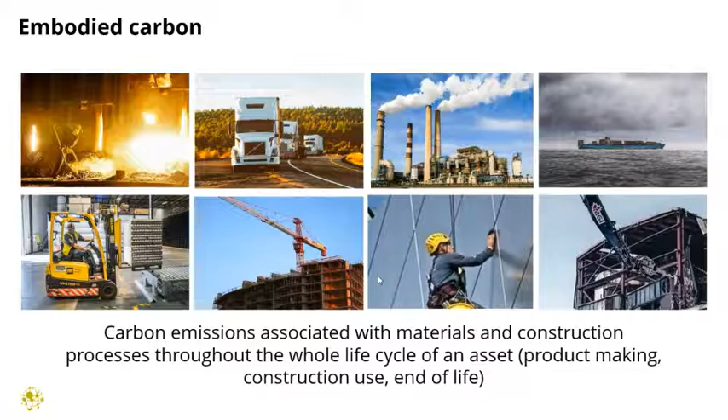First and foremost, embodied carbon. When we say embodied carbon, these are the carbon emissions associated with the materials and the construction processes throughout the whole life cycle of an asset. So this could be a building asset, or as we're talking about today, it would be the product itself, the MEP equipment.

So when you do an embodied carbon assessment, you can assess this through a life cycle assessment, which quantifies the environmental impacts. In this case, we're talking about the global warming potential. The different stages of the life cycle are defined by the EN standard into different stages and submodules, typically A, B, C, and D. So to summarize, if you were going to carry out an embodied carbon assessment, you would add the carbon emissions of the A stages you see on screen, the B stages excluding operational, which is B6 and B7, and the C stages as well, which is end of life.

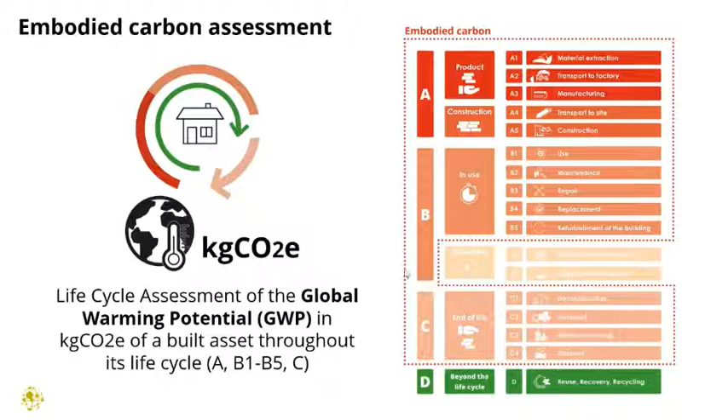This would form what is called whole life carbon of a building if you were to add the embodied carbon and the operational carbon together. We've become really familiar with operational carbon as an industry, but embodied carbon is that gap that's really being pushed for, even more so in MEP, as this is something that's not accounted for as often.

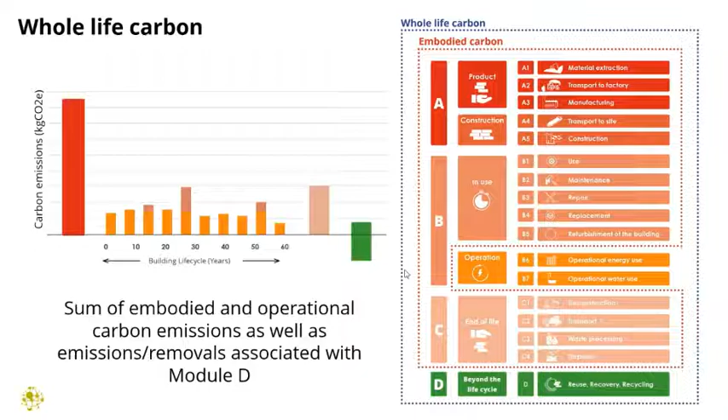Embodied carbon specifically is becoming more relevant. As I mentioned, operational carbon has been a focus - the grid is decarbonizing, we're installing more efficient MEP equipment. So as we see the pie chart of embodied versus operational carbon in more recent buildings and new builds, we see that the embodied carbon is really taking over this overall percentage, largely due to the operational really being a focus. So we need to bring the embodied carbon up to that same level.

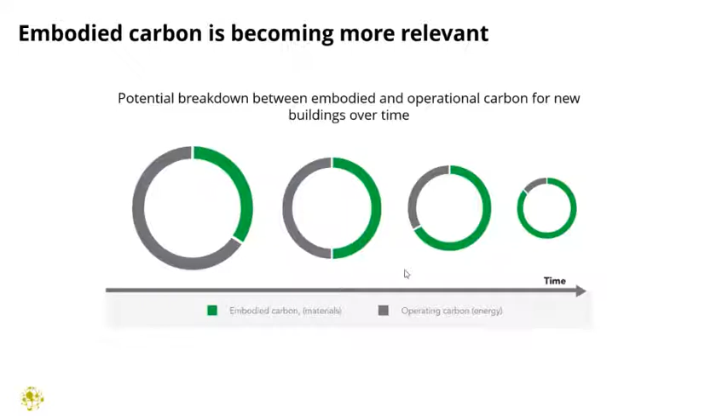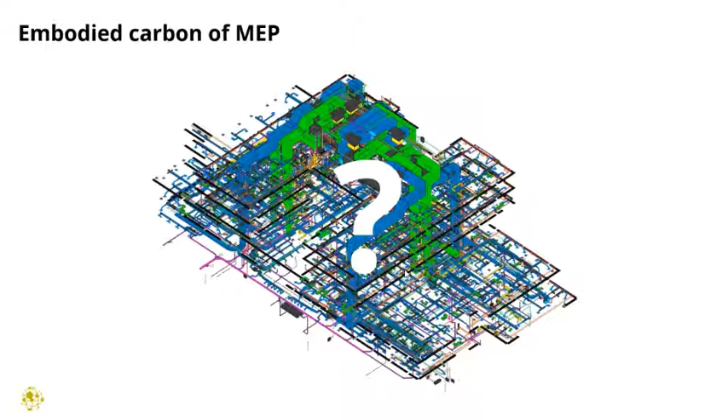And why MEP specifically? There's lots of conversations happening around the embodied carbon of structure and facades. You can find EPDs of different architectural elements, windows, just kind of the skin of the building, but not so much about MEP. It's really an area which lacks data sources, so that's why it kind of gets pushed to the bottom. But if you really think about it, it's something that can be really high in the overall embodied carbon impact of a building.

So if we want to think of the quantities, MEP is something that's quite hard to grasp because usually it's hidden - in risers and ceiling voids and so on. But if we really try and grasp what the overall quantity is, a study from the Carbon Leadership Forum estimates that for a commercial building, it can be between 15 to 25 kilograms CO2 per meter squared. So if you think about this for a 2,000 meter squared building, you could have about 25 tons of MEP equipment. And to visualize it further, that would be kind of equivalent to a humpback whale, which is massive.

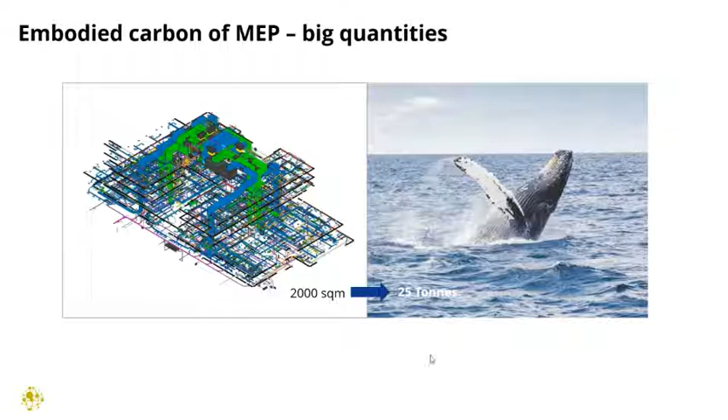The embodied carbon of MEP - another reason why it's really important is that it's usually made of very high impact materials. Steel is something we see used really often in a lot of MEP equipment for things like ductwork, casing, piping and pumps. Cast iron we also see a lot, used in component housing of equipment. Aluminium in electric motors and heat exchangers, and as we know, aluminium generally has a high embodied carbon impact. We see copper being used. LED lights have rare earth elements which also have a high embodied carbon impact. So that's why it's something really important to consider.

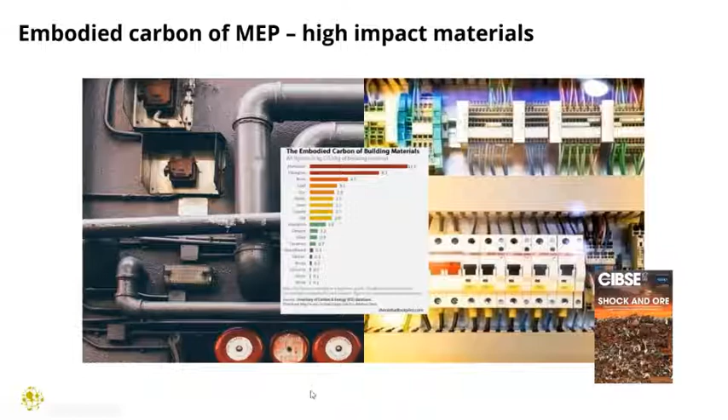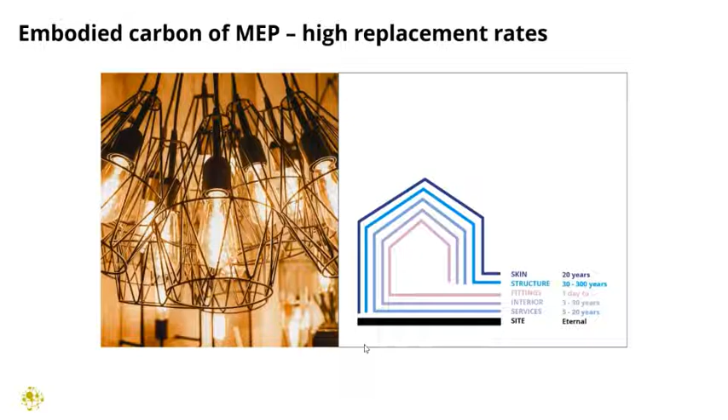The other thing to keep in mind is MEP generally has quite a high replacement rate. So if we think of the building life cycle being over 30, 60 years, generally the structure would not need to be replaced. The skin as well, unless it's a surface that wears very easily, it's likely that wouldn't need a full replacement. But MEP is something you can see typically being replaced every 10 to 15 years, just due to it being the end of life of the product.

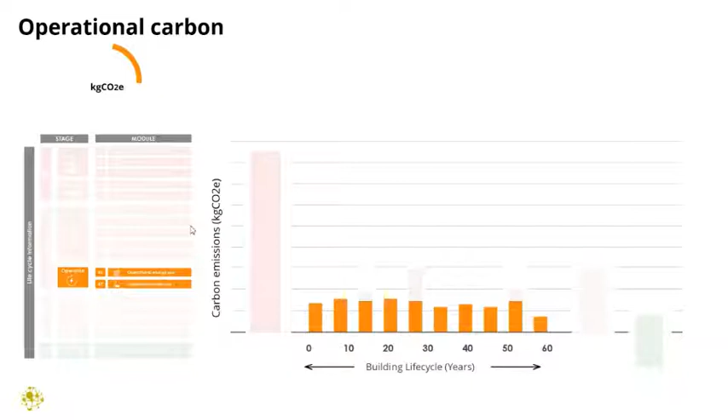This graph is just showing across the building life cycle - operational is something we see throughout the building's life cycle. Embodied carbon kind of fills in that gap. We have the really high upfront embodied carbon once we construct the building, we have the consistent repair and replacement impacts throughout the life cycle, and this is where MEP becomes really important. And then, of course, the end of life impacts as well. So this is just feeding into the bigger picture.

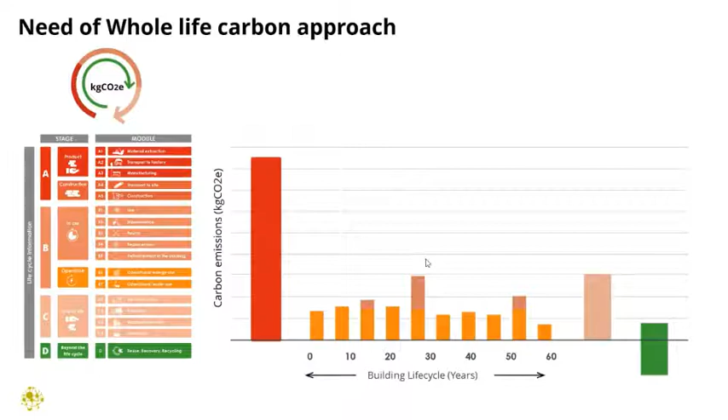Now I'm going to go through embodied carbon reduction in MEP design, and these are very basic, high-level things that you can look at, especially during early stages in the design process.

Firstly, less is more. This is self-explanatory - if there's less MEP, there's going to be less embodied carbon impact, but it really makes sense when you look at designing a building. That includes a fabric-first approach, implementing more passive design measures, which technically designs out the MEP because it reduces the overall weight of MEP needed as you rely on more passive measures rather than mechanical ones. And when you do specify MEP, which is inevitable, look at the products you're specifying - specify equipment with lower weight, that's just something to look out for.

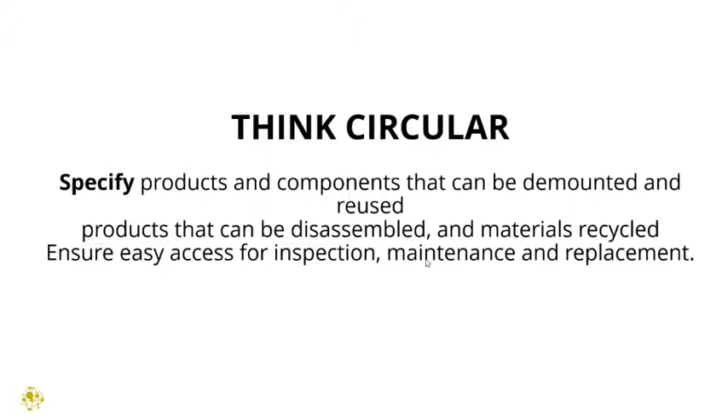The second thing is thinking circularly. So specify products that can be demounted and reused as well. Think about how they're assembled - are they using dry fixtures, like bolts, rather than adhesives? That allows them to be disassembled at end of life. Also work with architects to consider how the MEP has been designed for inspection, maintenance, and replacement. You don't want to be tearing out elements of the architecture to reach your MEP - so just early stage design coordination.

Thirdly is to mitigate and reduce refrigerant leakage. A lot of the MEP products we specify for cooling use high-impact refrigerants. So be conscious of what refrigerant is used in your product - first, ensure it has low leakage rates, and ensure the refrigerant is 100% recovered. For anyone interested in this topic, we've recently produced a refrigerant leakage best practice guide, which looks into more detail on how to mitigate refrigerant leakage, just because it's such a big impact.

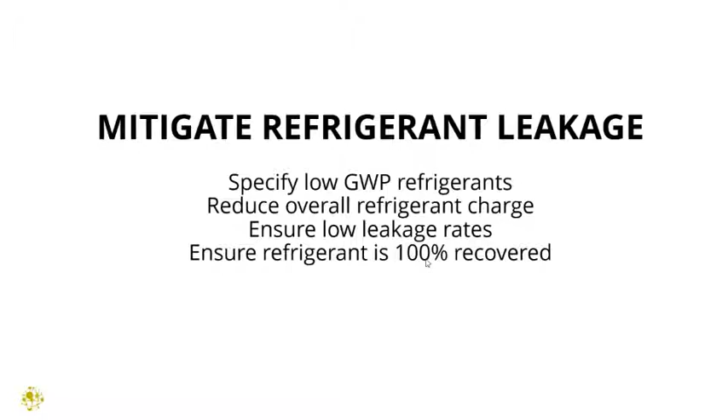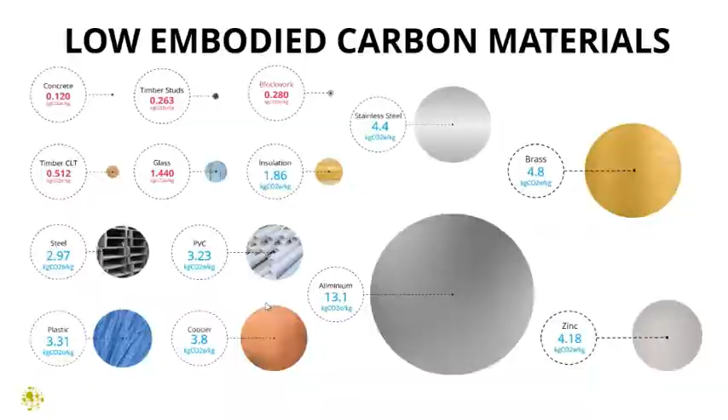For your own reference, hopefully everyone's downloaded the TM65 from the CIBSE website, but if not, you can always access it from the link on the website. We've included a few slides with flag placeholders, so if you're interested in reading a bit more, you can go to those pages.

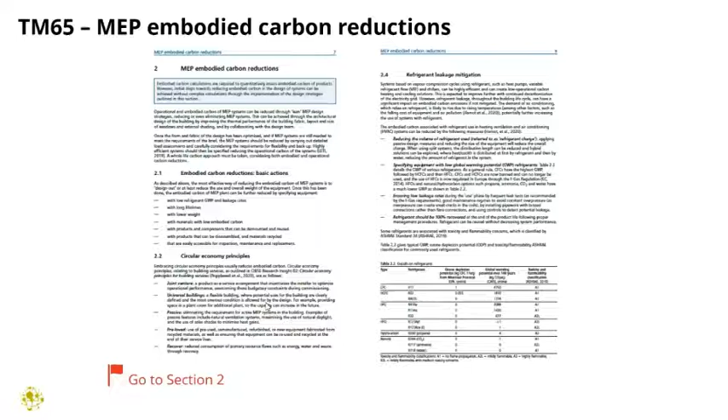So I'm going to pass along to Leo now, who's going to talk about EPDs and then take us through the TM65 methodology.

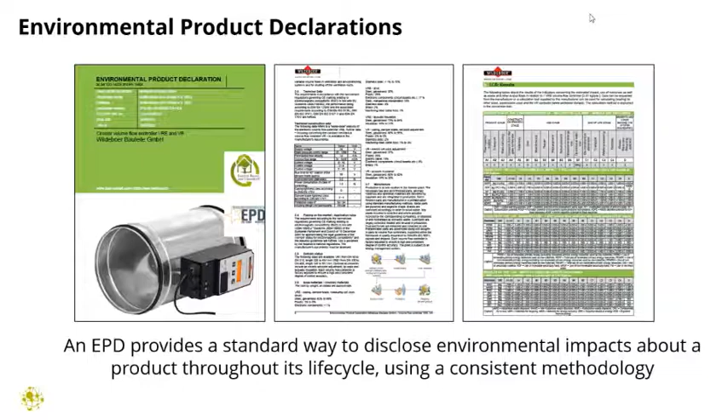Great, thanks a lot, Yara. So we're going to kick it off with EPDs, which stands for Environmental Product Declaration - a good source of information to understand whether or not the product we're assessing is actually low in carbon or not. What is an EPD? It's a standard way to disclose information, and the impacts about the product are disclosed throughout its life cycle, using a consistent methodology compliant with EN 15804 in Europe, which is the standard defining exactly how to structure an EPD.

Where do we find EPDs? The best source of information is usually the manufacturer itself, or we can have a look at some databases like IBU in Germany, or INIES in France, or EcoPassport in Europe. Eco Platform is another good source of information.

The issue with EPDs is that it's quite hard to make a comparison between two of them. The important thing to consider is, as they say, apples with apples and oranges with oranges. Whilst EPDs are regulated by the EN standard, even within the same product type and category, we find discrepancies relating to different understanding or different revisions of what's called a PCR - product category rules - which guides you through the process of developing an EPD. Hence the need for consistency, hence it's quite hard to compare these two.

This is where the CIBSE TM65 methodology comes in - we're exactly trying to bring that into the conversation. There is a knowledge gap, and that knowledge gap is exactly what we're trying to fill in MEP.

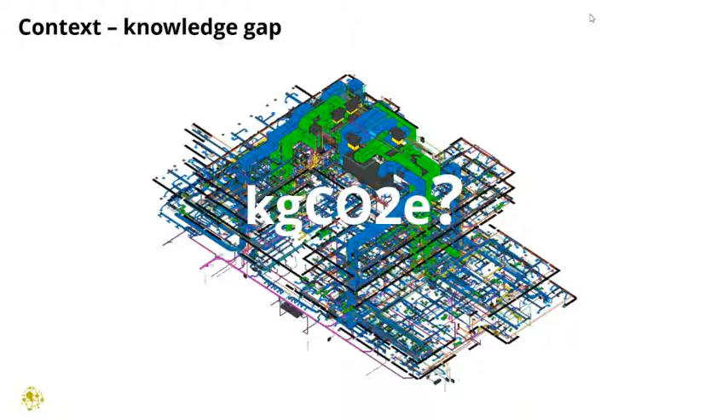It's quite hard to find EPDs related to MEP systems, and even if there are any, there is the additional hurdle of: can we compare this? Is it actually developed in the same way? Therefore, unfortunately, there is lack of information. Usually it's quite hard to find, but even if you find information, there might be lack of certainty when it comes to comparing things.

So the CIBSE TM65 aim and scope is really on embodied carbon at product level of MEP, and it was to create a methodology which is consistent to assess embodied carbon values when no EPDs are available. The goal is to create data and make research studies possible, and to make that comparison possible. The hope is that TM65 will also help building services engineers and industry to improve their knowledge of embodied carbon in building services, and then to make better decisions when developing a whole life cycle assessment and when thinking about different options for their buildings.

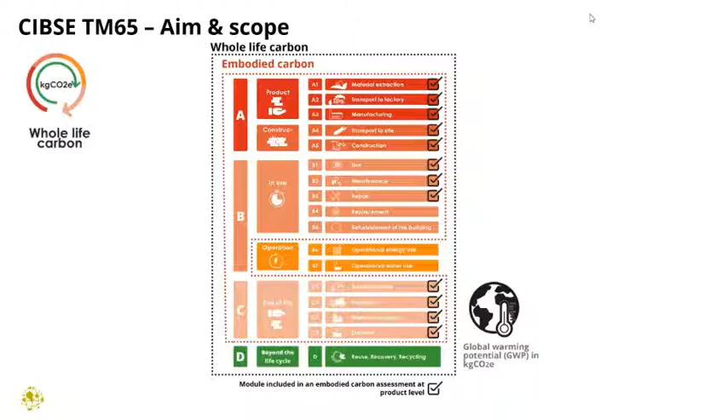This is by no means a final process, but is working towards getting that consistency while EPDs are being developed.

So how did we develop the process? What are the steps? We have three main steps. First, a data collection phase where product information is gathered from the manufacturer using a manufacturer form, which is an Excel file. Then we move on to the calculation stage, where there are two calculation methods depending on the level of information provided by the manufacturer. We have a section A filled in which allows us to do a basic calculation, or a section A plus B filled in which allows us to carry out mid-level calculations.

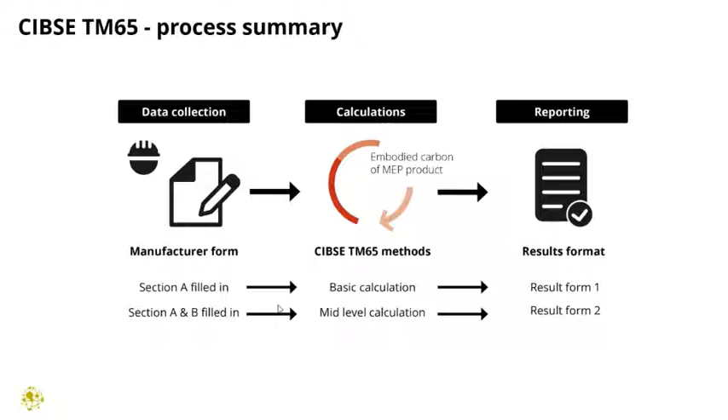The difference in terms of data, if we move to the next slide, we can see that both of them are much easier than an EPD. Basic being really quite approachable by even small to medium-sized manufacturers. Manufacturer involvement is quite low for the basic, so we don't really need to know that much from the manufacturer, and we can actually get in touch with a few. Mid-level calculation is a bit more, but what we can see is that in an EPD, both the manufacturer involvement and how detailed the results are is much greater.

The limitation here is that the ease of execution of an EPD is not really there, and the information that we need from the manufacturer is a lot. And this is, as we mentioned many times, where the TM65 fills the gap.

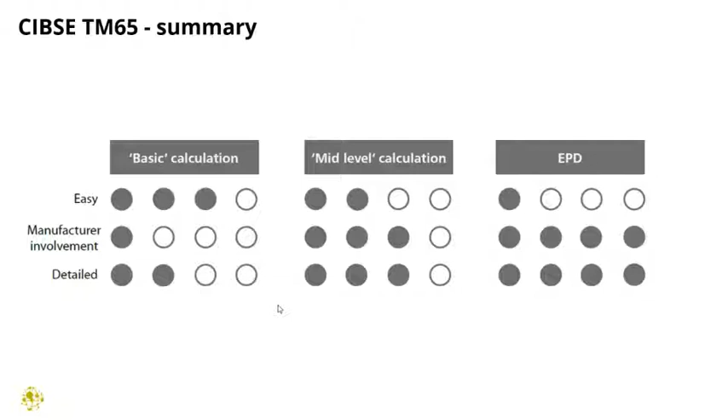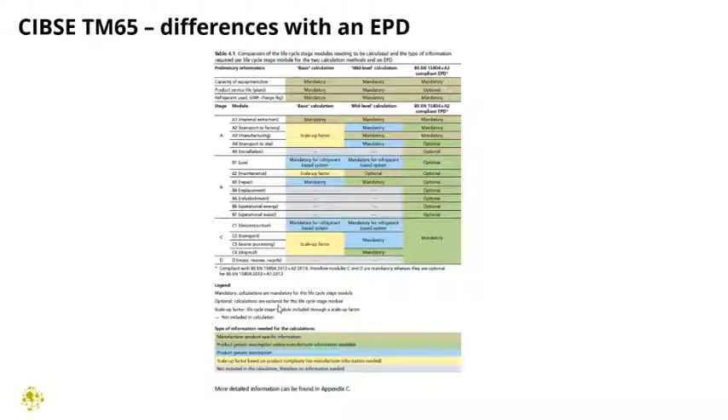So there is a section in the TM65 about the difference between an EPD and a TM65. It's color coded, so you know exactly what the assumptions are and at which life cycle stages - A, B, and C: up front, in use, and end of life. They're all detailed in there. As you can see, it's all greened out for an EPD, whilst other gaps are filled with assumptions in this methodology. You can find this at page 13 and Appendix C of the TM65 methodology.

The process, basically, we want to make clear that asking for an EPD should be the first step, so always go for that one. Always mention that it's worth investing the time if they're thinking about developing an EPD. If not available, mention also that this is a conservative type of assessment, and therefore we are pushing further for the development of an EPD if the resources are there.

The second thing is to ask the manufacturer to complete the form. There's two different types: part A only, or part A plus part B. And the last step is sending the information to CIBSE, which is really key - that's what we use to create the template, and it might take some time. But the useful thing about this is that we get the information from the manufacturer, we can get back to them and bring some value to them, but also we can create a benchmark for the product and build a database.

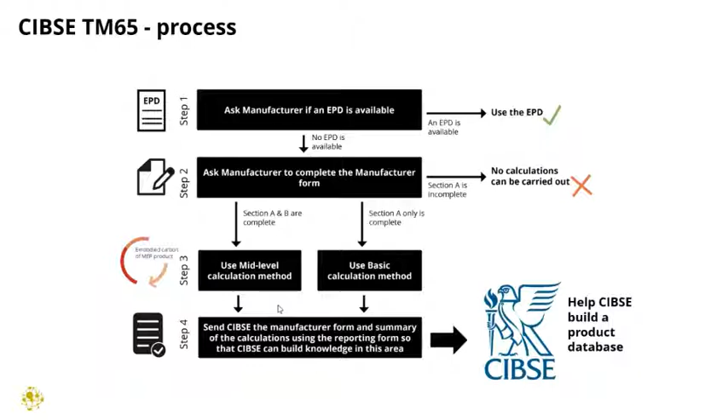So if there are no EPDs for the MEP equipment that you're considering, you need to collect data from the manufacturer. The manufacturer form is structured in three sections.

Section A, which is the basic, will need the manufacturer to fill out the material composition breakdown, which is actually the most important part. Then there's section B with supplementary information on energy consumption. And if the manufacturer is able to provide this info, there's also additional information that we, and CIBSE, will happily take on board, which has nothing to do with the calculations itself, but is about improving the next iteration of the process.

Before we move on, in section A we need at least 95% of the material composition breakdown. We assume that if we get at least 95%, the remaining 5% will actually be steel. If we don't have this basic information, unfortunately the calculation is not possible. So there's a really big focus on this aspect.

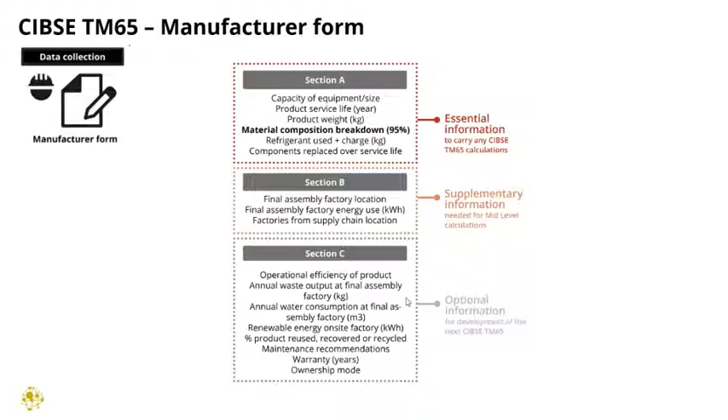Then you calculate the emission linked with the repair, meaning the components that are replaced throughout the life of the product. Usually, if not given by the manufacturer, it's about 10% of the overall initial impacts. Then you use the scale-up factors, which change depending on the product complexity, and finally we multiply by a buffer factor, as we want to make this basic calculation conservative. Finally, if applicable for the product, you can add your refrigerant leakage impact, which happens during the equipment use and decommissioning. So these are the 4 different steps.

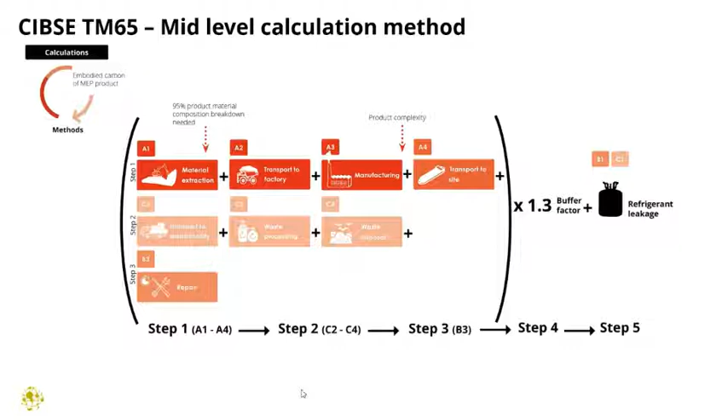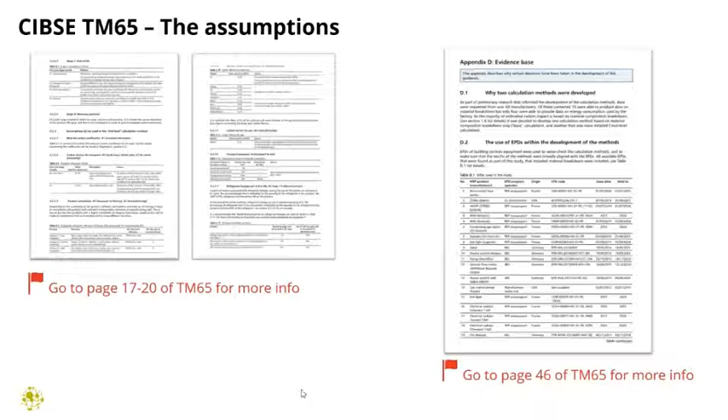Now, in the next slide, we can also show you what the different assumptions are. As we said, they are location specific for the UK, so you need to be mindful of that if used elsewhere, but basically you can find them on page 17 to 20 of the TM65, or also page 46 of the TM65, again, for additional info.

For reporting results, you can clearly outline your inputs and outputs. That's quite important—transparency is always quite critical when reporting for embodied carbon calculations. We encourage people to be consistent and to make it easier to analyze data, again in case we need to go back, check the assumptions, and then use this information to further improve the methodology in later stages.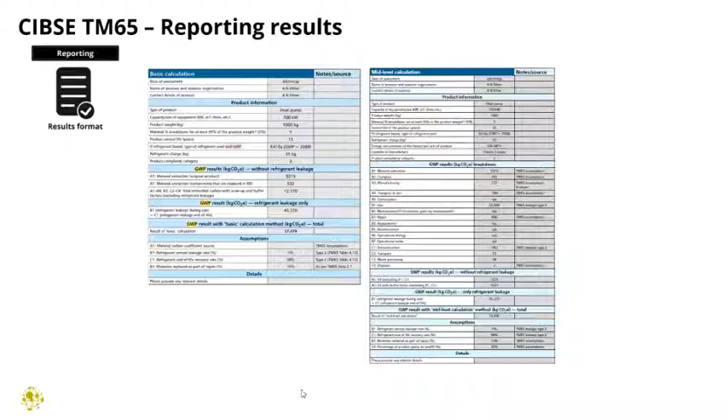The next slide actually shows the different impact between using a basic calculation and a mid-level calculation. What we can see here is the basic calculation is quite simple in the sense that we don't have that much granularity or transparency on what's going on behind the curtains in terms of the manufacturing side of things.

What we wanted to represent here and pinpoint exactly is the material extraction and material composition, which you can see highlighted in blue. B3 repair is allocated as a percentage if not provided by the manufacturer. The rest is a scale-up factor plus buffer factor, which even compared to a mid-level calculation, which is still conservative compared to an EPD, is higher. So yet again, another incentive to provide more rather than less.

Even just from the list of different LC modules assessed here, you can see we have much more granularity of what goes on behind the curtains.

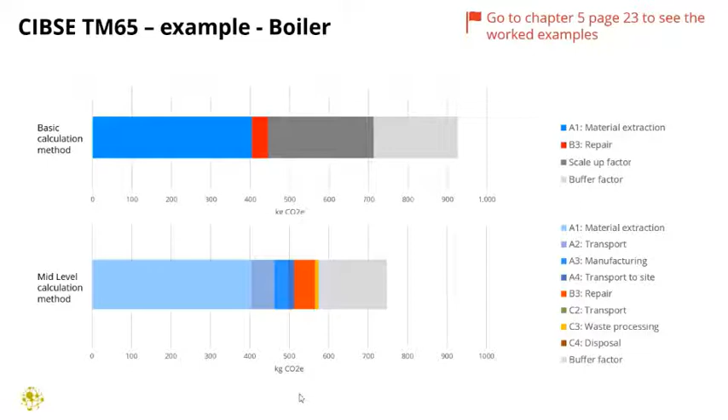One way I like to describe it to the manufacturer is: yes, you can give us only the basic information, but if you want specific information on your manufacturing line and your production energies, whether or not you're being more sustainable, using less energy, we need that information. Otherwise, we have no visibility and we can't represent that properly in our final results for TM65.

Moving on, you can see here the appendix, which is taken from the TM65 — we also used it in the previous slides. I highly recommend going into the appendix and checking it out, so you can see bit by bit what each individual scope and each LC module we calculate represents, how we do it, and get an understanding of where we fill those gaps with assumptions. Taking an inside look and understanding the methodology yourself is always advisable.

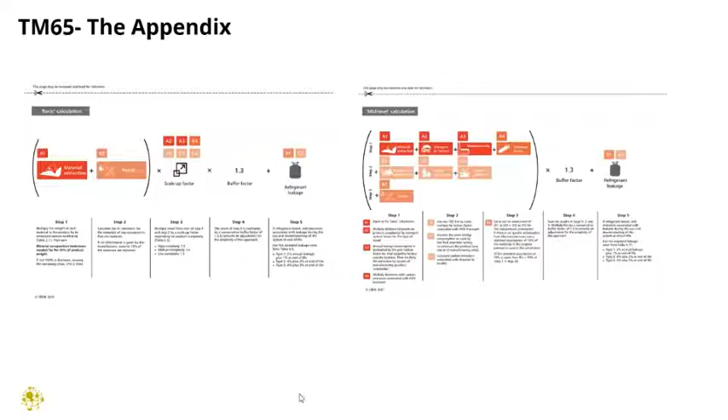Thank you, Leo. I'm going to jump back on to take us through a CIBSE TM65 worked example. The purpose is to highlight some tips and things to look out for when doing this, and to show you that it's something you can actually produce quite quickly. So although it seems complicated at first glance, it could be simpler than you initially thought. We're going to look at a heat pump, for example.

This is information that you would get from a manufacturer. Say you've sent them the manufacturer form and asked for section A. They've specified it's a heat pump, we have its weight, its capacity, and they've given us a material breakdown, and so on. So the first thing to ask is: is this all the information that we need?

The first thing to spot is that if we compare, they had only given up to 95%. So that's your first flag — as Leo mentioned earlier, it needs to be a minimum of 95% in order to carry out the calculation.

The next thing is, because it's a heat pump, there's refrigerant associated with it. So it's always important to know the type of refrigerant used, so we can calculate the global warming potential impact of that refrigerant across the life cycle of the product.

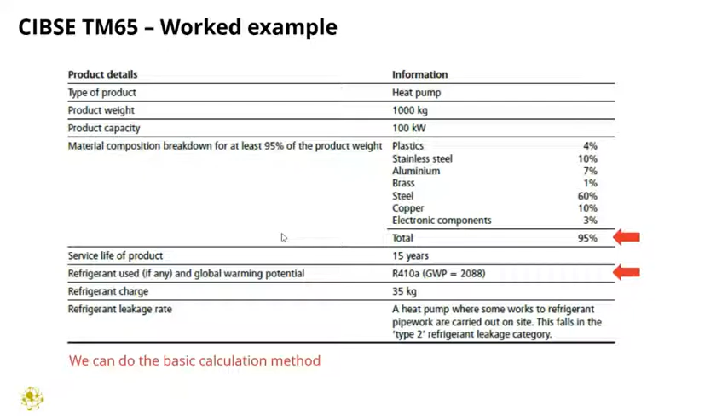Now that we have all of that information, we can go ahead and apply it to the basic calculation method.

The first thing is step 1, where we look at all of the materials they've given us and multiply the proportion of that material by the embodied carbon coefficient. Here we looked at steel, aluminium, plastic, stainless steel, copper, electronic components, and brass — those are all the ones in the initial manufacturer form.

The thing not to forget is that in order to get it up to 100%, you always need to account for that remaining 5% of materials. In all cases, whatever the remaining percentage is, you would just assign that to steel, and that completes step 1 of your calculation.

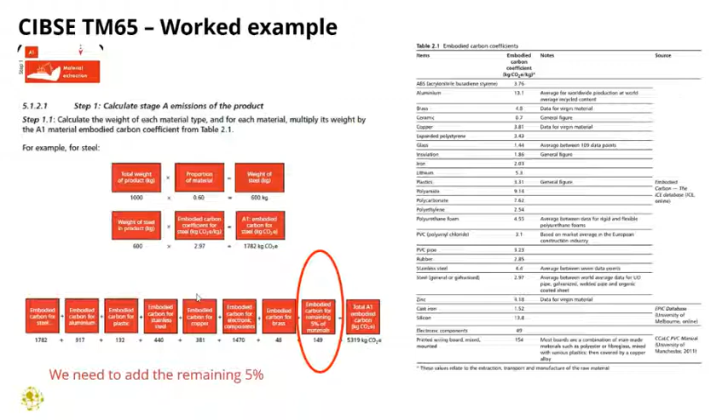For step 2, these are the repair emissions — the standard 10% if this hasn't been specified otherwise by the manufacturer. So if A1 is 5,319, you would just add 10% of that for your A1 repair emissions.

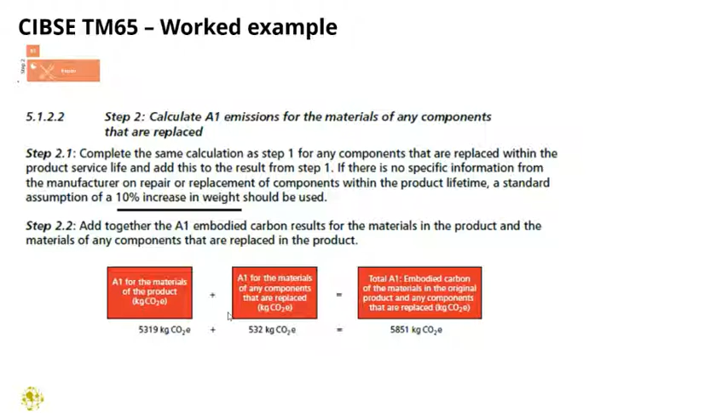And then following on from that, we need to add a scale-up factor. So in the TM, there's table 4.3, which highlights different scale-up factors associated to the complexity of the product. This is related to the rounds of manufacturing it needs, how many parts are in that piece of equipment, and this will range from something as small as a valve, for example, to a heat pump, which is much more complex in comparison.

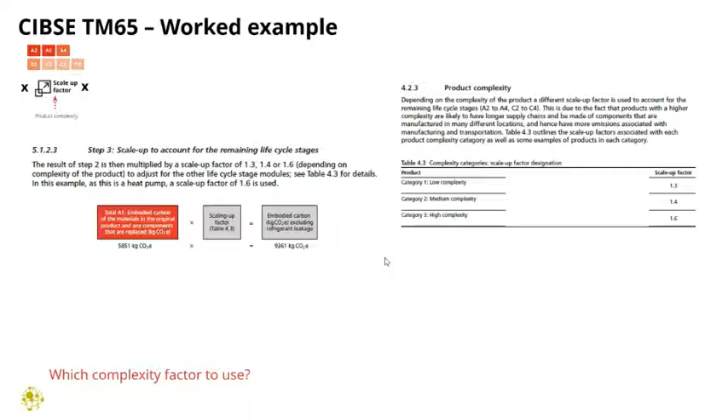So if we just think about the composition of a heat pump, which complexity factor we would use, just logically, because of how it's made up, you can see that we've assigned that to category 3, which is a high complexity factor, multiplied by 1.6. In comparison, low complexity includes pipes, ducts and valves, for example, which are much smaller and less complex pieces of equipment.

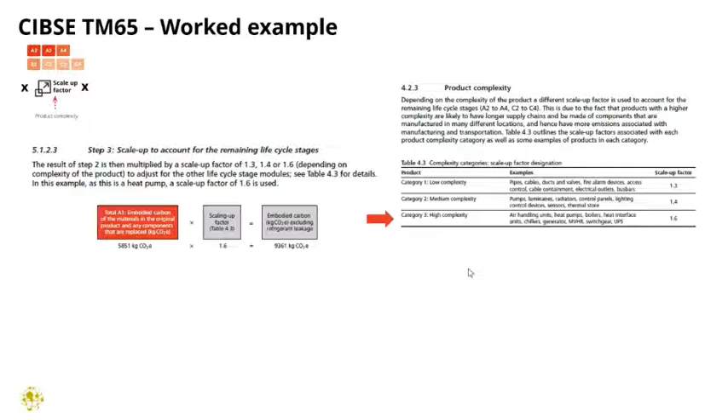And then going on from that, to complete your basic calculation, you always need to multiply this by a conservative buffer factor of 1.3. This is, as Leo was mentioning before, if the manufacturer isn't able to or isn't keen to dedicate the time to give you information on the manufacturing process itself, we still need to account for that, and it's a conservative assumption. So that 1.3 is aligned with the French default methodology. And that would give you your final embodied carbon.

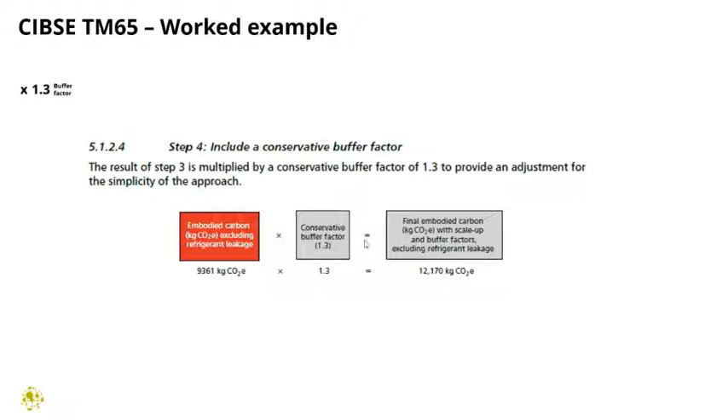However, it's still excluding the refrigerant leakage. So the refrigerant leakage is a calculation you add on at the end, and that would be the lifetime leakage impact of that heat pump product. You would add it, and that would give you your total result. As you can see, in comparison, refrigerant leakage is a really high embodied carbon impact for an MEP product.

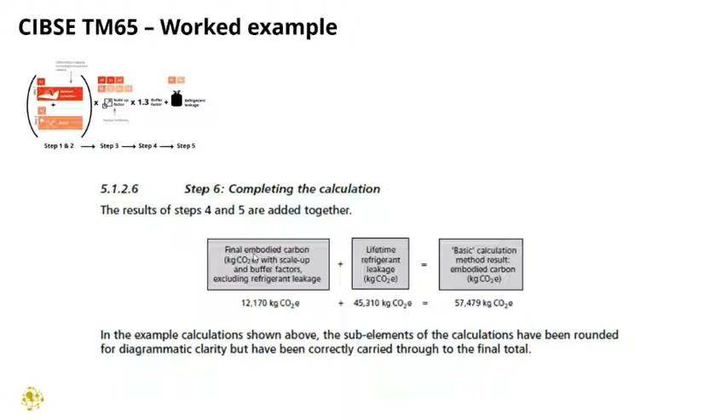So to give everyone a bit of insight on TM65, next steps and where we go from here now that the calculation methodology has been defined. First thing to consider is today a lot of the attendees we're talking about are based in the UAE, and TM65 was tailored towards the UK, which is where the methodology was created. There are some things that need to be accounted for and adjusted if you were to apply it to the UAE or Middle East and wanted to use it often.

So something we're looking at is working on an addendum of the TM65 specifically for Australia. What it involves is working with a working group in the area that can do research and provide figures relevant to the region. From that, you can develop your own standard transportation distances, transport carbon factors, electricity or gas carbon factors relevant to the region as well, and other assumptions related to recycling rates and disposal of the products.

So it's just something to keep in mind. If it is of interest and if there's enough interest in the region, there is a way to do that, to tailor it completely to yourself so that you're able to use it more frequently. It just needs obviously time and people working together to find those figures.

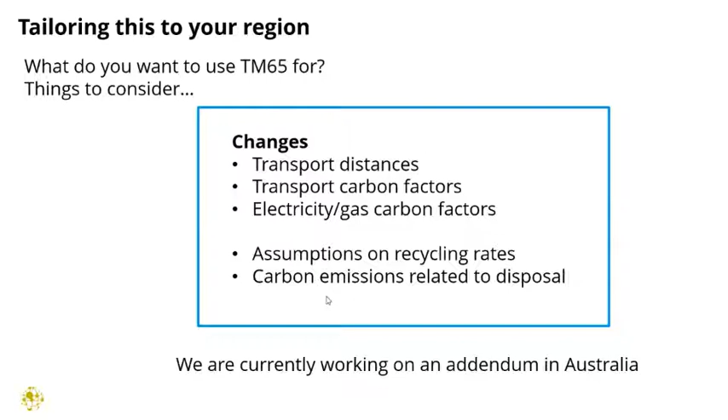Another thing that will be coming out shortly is a TM65 tool. At the moment, when you download the TM65 package, it comes with the manufacturer form, the reporting form and the actual guidance, but not a calculator tool for you to just put in the numbers and get the results. That is something being developed by CIBSE at the moment, and hopefully will be part of the download package as well, which should make the process a bit more streamlined.

So this is how it would work. Currently, you get the first three, and the idea is that you add the calculator tool to that package.

And to further our research and development and what the TM65 actually produces in terms of a database and results, we're taking this further within Integral and Elementa Consulting to look at the embodied carbon of heating design in residential schemes, which is our first one, currently in its final rounds of editing, and also kicking off another one looking at the embodied carbon of HVAC systems in offices. So we can look at resi and commercial and try and get a rounded picture.

So for the embodied carbon of heating design in resi schemes, just going to give a bit of an initial insight into what we've found before it goes live and before it gets published.

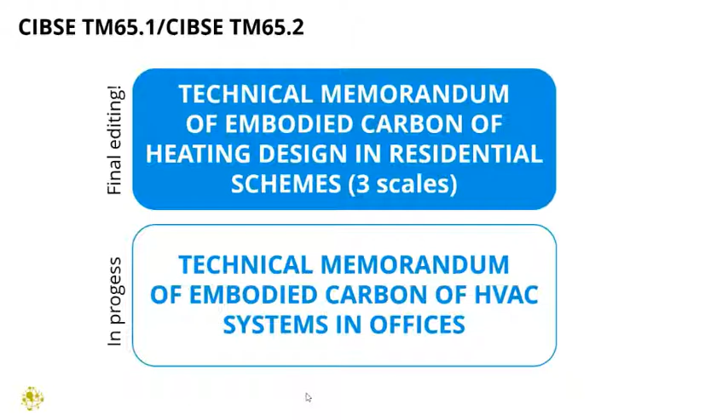So we looked at around 30 different products with 80 different data points, and we analyzed these at a product level and then at a system level as well. And we looked at comparing individual heating systems and communal heating systems.

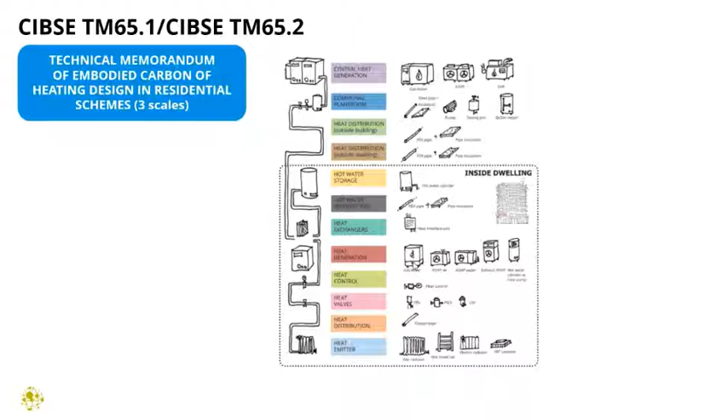So you can see here the diagram shows a range of products. We looked at gathering data for heat generation equipment like gas boilers, heat pumps. We got pipe information as well, heat emitters.

We got information on some radiators, VRF cassettes, and so on. This was expanded into 4 different sizes. We got our terraced house initially and then expanded it across a 15 unit development, 100 unit development, and then a 2000 unit development, which is 10 blocks of 200 units, just to see what the difference would be across these different typologies.

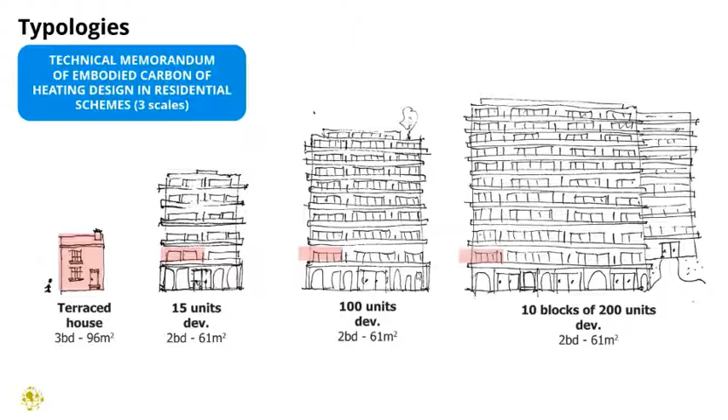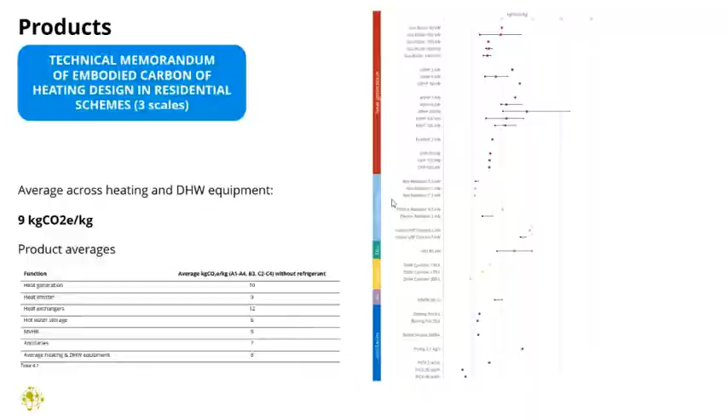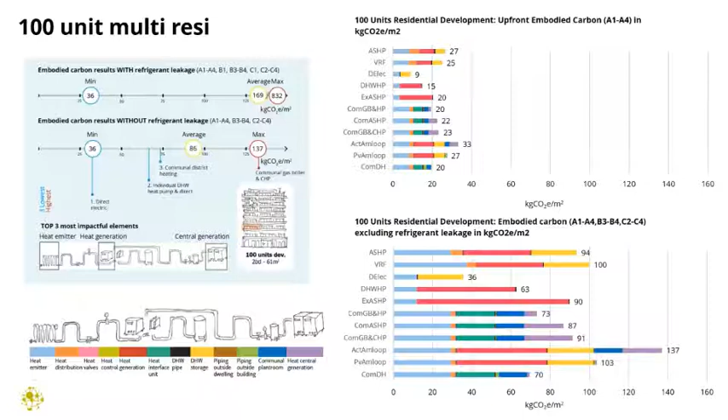Those product numbers I just showed were then expanded into the heating system. You can see here down the side, an air source heat pump example, a VRF example, direct electric. We've looked at ambient loop, both active and passive. We did an in-depth study to understand the quantities used in each of those systems, and once we gathered our TM65 data points, we extrapolated those and estimated what they would be, and compared those impacts against each other.

And last but not least, TM65 training. This is something that we hold online in collaboration with CIBSE. It's actually held by my 2 colleagues, Clara and Louise, that wrote the document itself. One session's already gone, there's still a future one. I think the tickets might also be sold out for the 17th of November, but CIBSE is always open and keen to add more, so if people are interested, you can always register your interest with CIBSE and they can get that sorted for you.

Basically, it's just going to take you through the methodology in more detail, doing more worked examples, and just really giving you that time for Q&A and understanding the methodology in more detail.